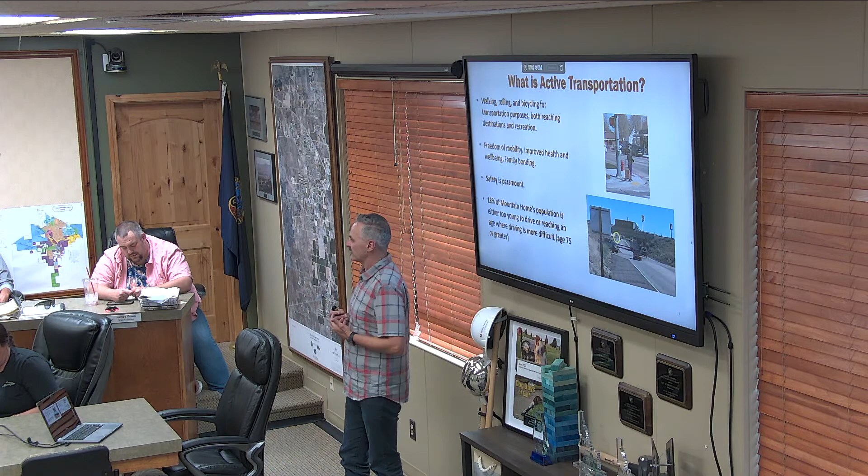In terms of active transportation, what is it? It's walking, rolling, or bicycling—rolling meaning folks using other types of mobility like scooters or people with disabilities—and looking at how they do that for transportation purposes, just going somewhere, whether it's a school, a park, a grocery store, a senior center. The big thing that differs in that realm is the senses we experience through it. That's just much more right there for us than we tend to have in our automobiles, which take away a lot of our senses. We even now have noise-canceling cabins in our vehicles and things like that.

Really for our community, when we think of statistics, roughly about 1 in 3 are at an age where they're either too young to drive or reaching an age where driving is becoming more difficult. It's about their freedom to move about their community, especially here in Mountain Home. We've tried to take that through that lens in looking at this.

So a little bit of Mountain Home by the numbers: you guys are close to 16,000, with some notable growth numbers. We know we've seen the growth before, and because of the dynamics, especially with the base and other things, 1 in 4 of your population is age 18 or younger. Weirdly enough, 1 in 8 is over the age of 65, which is a bit of a different number than we see in a lot of places—we start seeing more of an aging population here.

1 in 5 have a disability in the city, and another interesting statistic is more than 50% of those that do are actually in what we'd call the working age, 18 to 64. Oftentimes we'll see this number reflected more in the older adult population, and I'm guessing whether that's from veteran status or other things related to the military. But if we know 1 out of 5 has a disability, we know their ability to get around, cross the street, and do some of those things is limited.

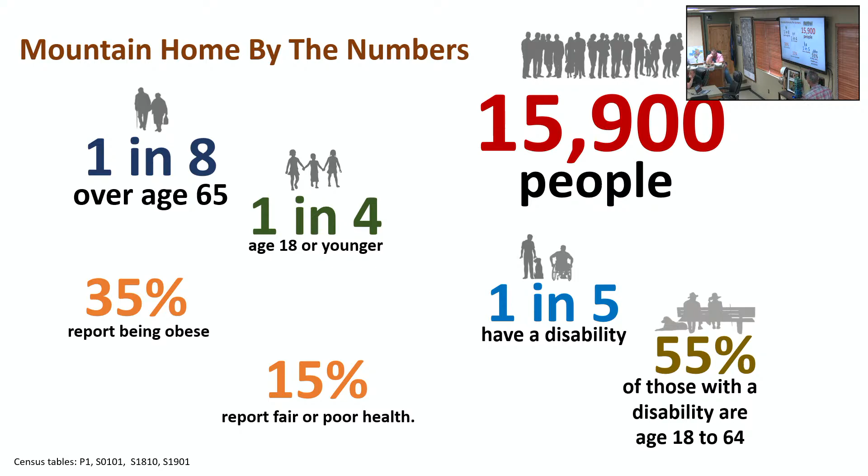Our work and efforts try to integrate things about health and improving that part of the community. The data for the city shows about 1 in 3 report being obese, with about 15% reporting overall fair or poor health. This has given folks the ability to address that.

One of the things that happens here, if you look at census numbers, one limitation is that the only transportation figures included are people's journey to work. In much of Idaho, and you're no exception, people's journey to work takes them beyond the city limits, whether they're commuting to a place like Boise, which we see a significant number of, and certainly the Treasure Valley.

When we talk about the walking and biking piece, we know there's a limiting factor in terms of the commutes. Instead, look at it through the lens of when people get back here to their community, how can they access the destinations and places they want to be if they've had to go through an hour or so commute.

The map shows the data in terms of what those commute flows are, or it did. I don't know why it disappeared. Come back, maybe. Never had that happen. It could be our HDMI cable. Just saying. There we go.

So what you see in the circular number is of the people that live in Mountain Home and are employed, 1,800 are able to live and work in the city, but 4,000 every day leave the city limits to go elsewhere, Air Force Base, other parts, and 2,200 live outside the city and come to the city to work. So that's some of the dynamics that we're working with.

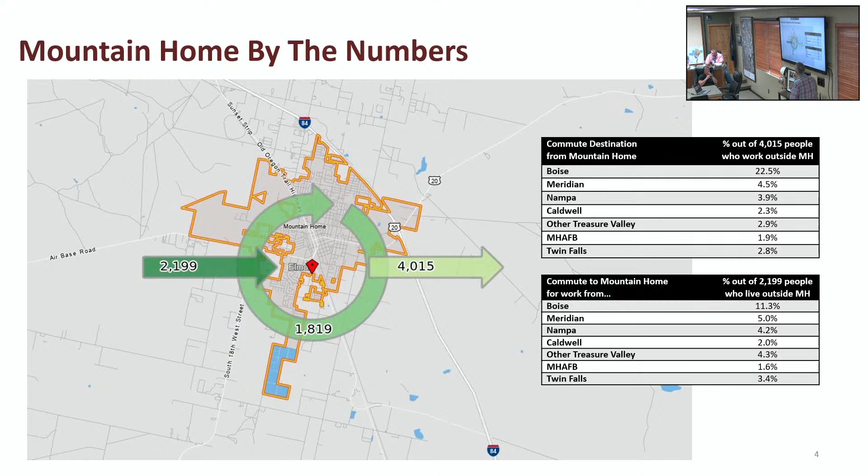I'm going to turn it over to Chris to talk a little bit about the bigger picture of things and why some of this is important, talking about the reasons why people, and the studies show, are willing to walk and what they're willing to walk for.

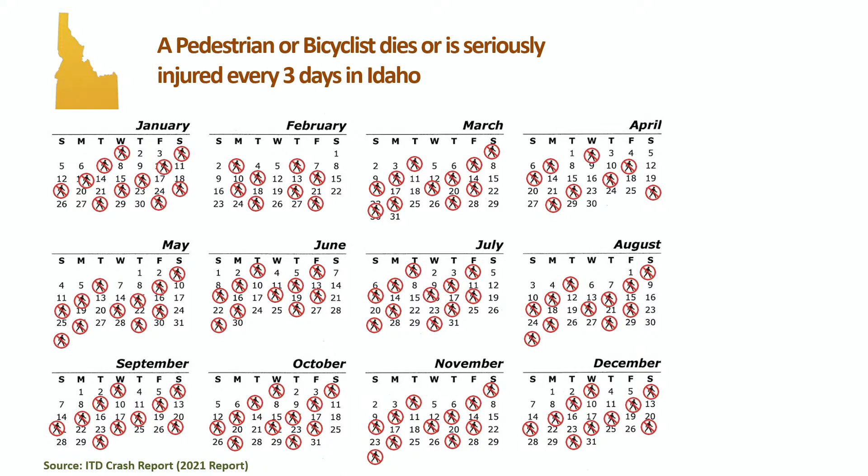Magnitude of nearly $400 million. Overall. Was that me? That's reverberation there. Sorry, anyway, just making sure.

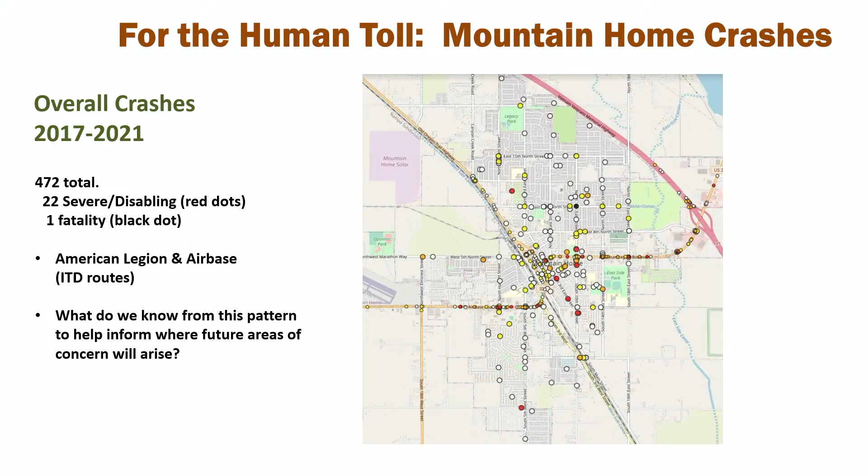But there are some pretty interesting things that we see. You can visually look and see for yourself where we see hotspots. Out of the 472 all-in crashes, this is not just a bike-ped crash, but all in, 22 were severe, 1 fatal, and we definitely see some patterns. We'll look at that now, specific to bike and ped. This was something we crunched just a couple days ago, and it was pretty compelling to me.

It tells you that this is a place where people want to walk because of the land uses. It tells you of the safety issues of crossing and so on. It says a lot. But when we think about that, the question is, okay, what do we do with that? So I want to breeze through these 4 C's components, and hopefully plant a few seeds about some of this stuff.

When we think about roadway design, I want you to start thinking about comfort first. We think a lot about our vehicles, our vehicle speed. We think about if 4 or 5% of all traffic is comprised of freight, it totally changes the geometry we apply to the streets and the curves and so forth. We think about our headlights, our vehicle height.

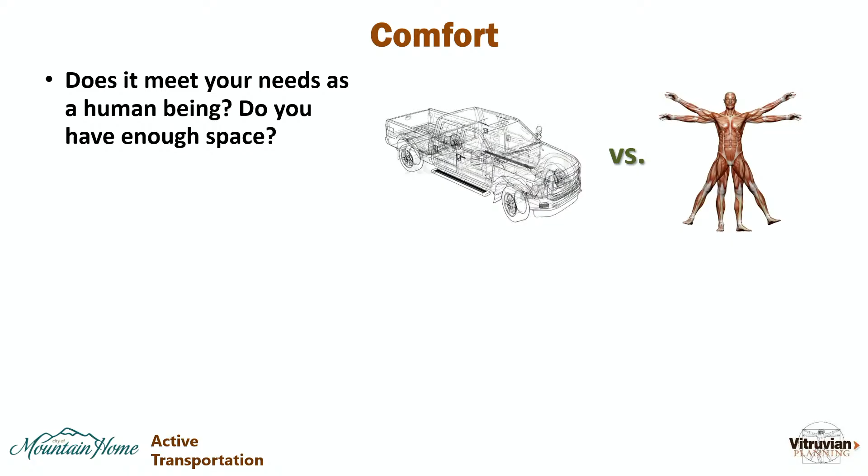But I want you to think about this other part of it: your comfort, your height, your sight, your width, your walking speed, all of the things that go into making you, and we look at all of the people of Mountain Home, our differences amongst one another. So when we put this all together, we need to think about, at least in some respects, our width. I think about, we put people in hula hoops as a demonstration tool.

Shaking your head, I don't remember who we put in hula hoops while we were here. Who was it? Do you guys remember? We always try to put the mayor in, so you're lucky you missed out on that one.

We do it for a reason. When I ask about your personal space, how much space do you feel like you need in order to be comfortable next to the person next to you? Almost to a T, it's about right here, this much. This is the bubble. That hula hoop represents the bubble space.

When we think about our sidewalk space in a residential context or in our downtown, we think of multiple scenarios, someone who's jogging versus walking, someone in a wheelchair.

All these different dimensional needs are important. The last thing on this is also thinking about this vertical barrier. I want you to think about your code. That's part of why we wanted to have this joint meeting, thinking about your own code.

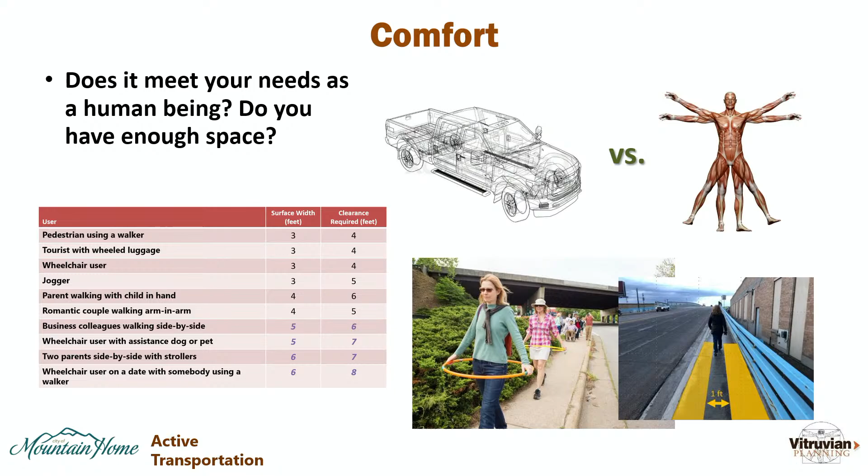If someone put a fence on their property line, right on the edge, next to the public right-of-way, i.e. the sidewalk, what does that mean? It means our functional width of that walk space could be reduced, even on a 5 foot concrete surface. We don't walk right up next to it, we give ourselves space. That's why in our code we often back that fence off by 6 inches or maybe even a foot, trying to make sure we optimize our sidewalk space.

Other comfort factors include speed. Speed is a massive, incredibly important factor. When you see children walking all the way off to the side, what are they doing? Are they unintelligent human beings walking nearly in the ditch? No, they're trying to protect themselves because they physically sense the speed of motorists coming towards them, trying to avoid being a statistic. If it's 20 miles an hour versus 40 and you're struck, there's an inverse relationship between survivability.

It makes sense. A slower speed is efficient in some ways, and we're hopefully trying to avoid being the statistic we talked about earlier.

Context, the next of the 4 C's, number 2. Context is really important in the sense that not one size fits all. Again, if I look at your code, and we did this as part of your plan, so that's going to be in the report, in a working paper: how do we differentiate our commercial zone, our industrial zone, our residential zones in terms of our application of a walkability type of principle?

They definitely ought to change because the environments change. If we just apply a one-size-fits-all 5 foot facility everywhere, it's not really going to be used by very much, it's not optimized as an investment. So the tax dollars you're using to put that infrastructure in may be limited in its return on investment. Context is a big piece of that.

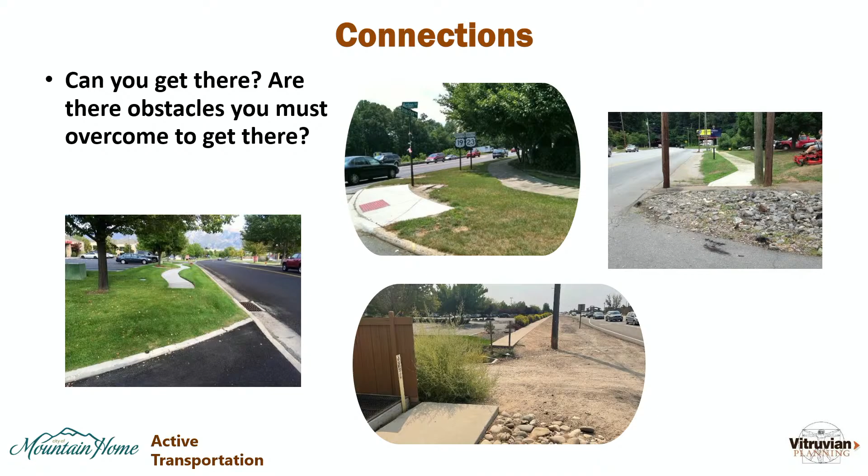But what about in the interim? There are so many other ways to allow us to get from A to B and provide some basic types of infrastructure before we even have to get to curb, gutter, sidewalk. That's part of the things we've talked about and are going to be in the plan we provide to you. So those connections really are important.

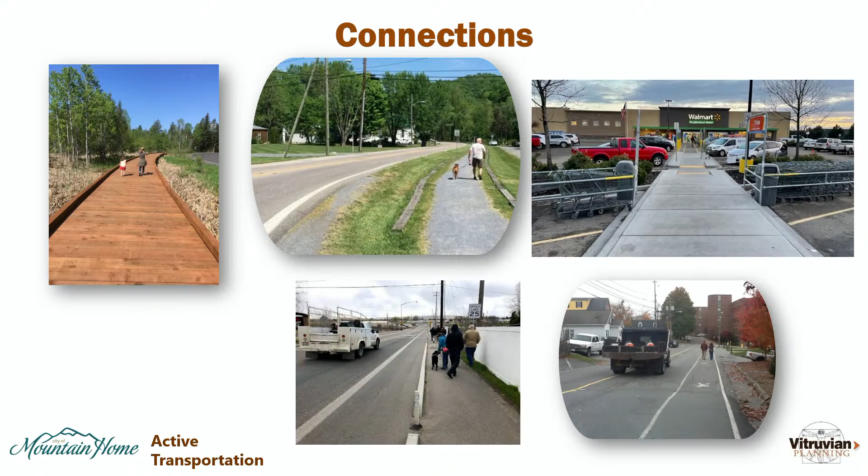Other ways, even getting to the front door of a major retailer or even a minor retailer, but not having to worry about dodging vehicles coming in and out of the parking area and other pieces. You get that. Last thing for me in terms of the C's is crossings.

In our state and really across the country, give or take about 65% of folks who are struck and injured, killed, what have you, involves this - just trying to cross the street, man. I'm just trying to get from A to B.

One thing that drives me nuts is going around this country and seeing bus infrastructure - we have a bus stop, and if we don't have a crosswalk to get near, then that is a wasted opportunity and wasted investment, frankly. And we ask the question, well, no one's riding the bus. Well, if I can't get back and forth to it, then that's your answer, at least in part, right?

But this crossing is so important, and we spend a lot of time coming up and describing various ways to help get across the street. When we go out on the walk, we'll illustrate some of that. So whether it's curb extensions that bring that closer together, the whole point is just keeping me out of harm's way. It's limiting the amount of time I'm exposed to essentially a moving vehicle that could hurt me, right?

So there's lots of different things, these are just some of the keys. Minimizing crossings, the distance between crossings - ask yourself this all the time. If you're in your city or another city, and you want to cross the street and you look around, right? Where's the nearest crosswalk? Marked crosswalk - oh, it's clear over there. What's our impulse?

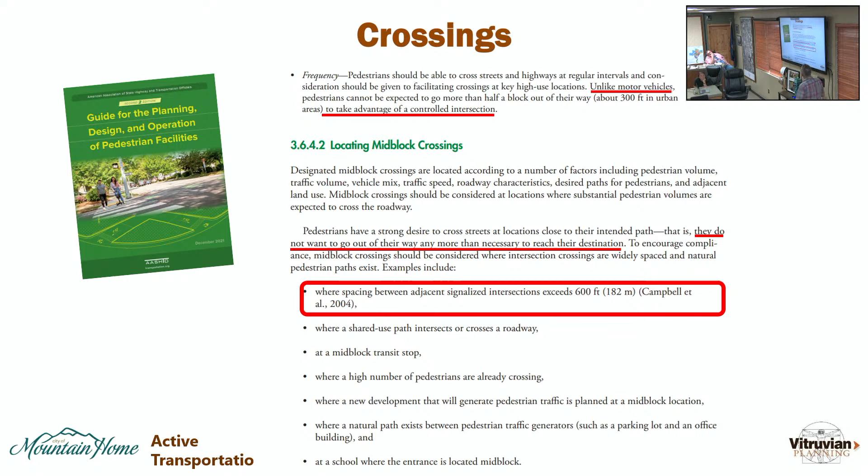So Chris covered a lot on the walking side of things, and that's really the fundamental thing. It's something we as a species are designed to do and have been doing for a long time, and it's the mode that most people take part in.

I want something different. What the science now tells us is, in the same way we separate a sidewalk from moving traffic, we should think about bicycle facilities, especially on higher speed routes, because that's what people are more accustomed to. If we make this investment, we appeal to the broader population and support the kind of trip making where people are willing to get places by bike with their family, to get to the park. The best example of that is the pathway system you already have.

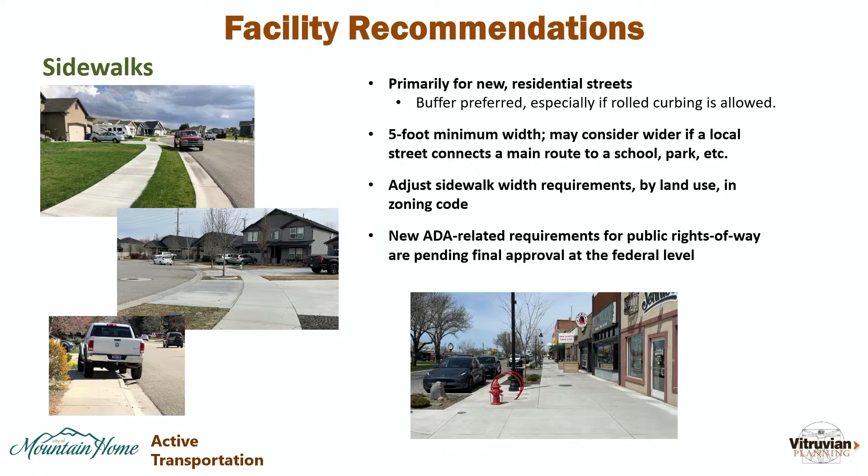As Chris said, adjusting sidewalk width requirements in the code by land use. Do we need sidewalks and a big pathway on both sides of an industrial street? Probably not. Let's reserve that for the areas that may be more conducive to those kinds of things and be sensitive to how those different land uses do occur.

So when we get into specifics, this is what you're going to see. I'm going to move you through some different facility types that are mostly combined for active transportation and the types of routes they would go on. Getting back to the effort in terms of buffered facilities for bicycling and walking, what's called a side path is really becoming the preferred treatment, especially at the ITD level for roadways—no longer the in-street bike lanes.

We might need to adjust for right-of-way. We may need to consider doing this on only one side of the street, but it gives you the foundation to start that conversation. And oftentimes when they go through those things, they will look at your city plans to kind of start that discussion. And certainly you guys, I think, with the downtown project have a really good rapport. I think they showed some flexibility in other things that we definitely use as examples in other parts of the state when they have the same efforts.

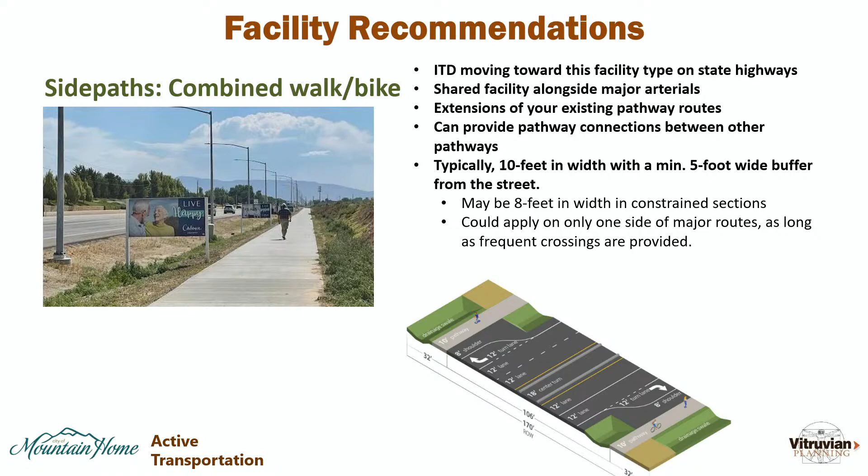In general, they're 10 feet in width with a 5-foot buffer, but you can go narrower and put in vertical elements if you have constraints. We will outline some of those design conventions in the plan.

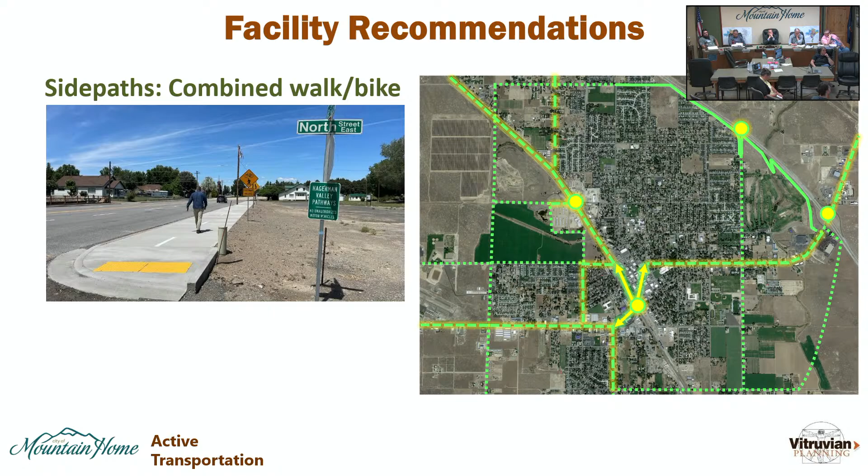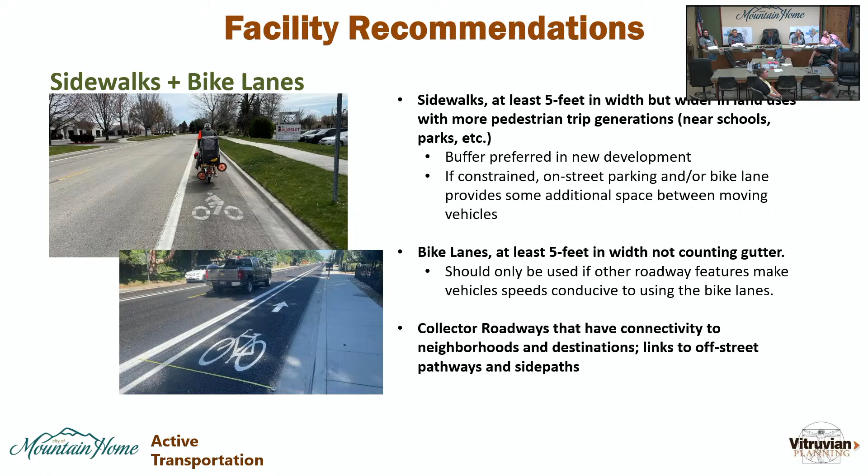Working our way down, it's a combination of things—one being a more traditional approach of sidewalks plus bike lanes, generally reserved for streets with lower operating speeds and lower vehicle volume, so people are more comfortable, though it's still necessary to manage speeds. So whether it's a buffered bike lane without a buffered sidewalk, or a bike lane with a buffered sidewalk, that's a combination. On the north side of town, a lot of those north-south local routes that connect are the types of situations we'd look for that. Given some consternation and street constraints about bike lanes, if we can do other things to calm traffic on the street, it makes it safer for drivers as well.

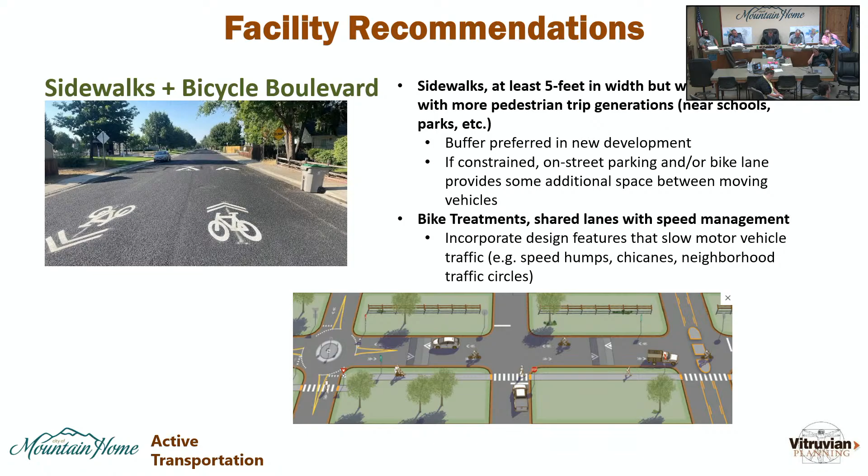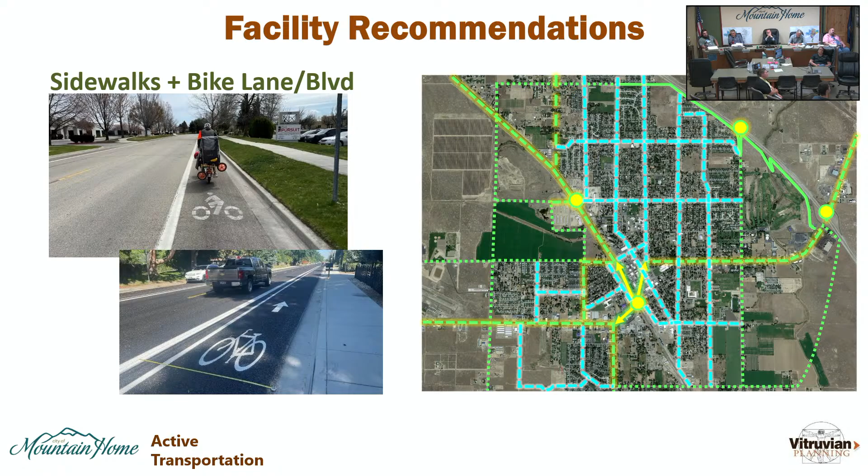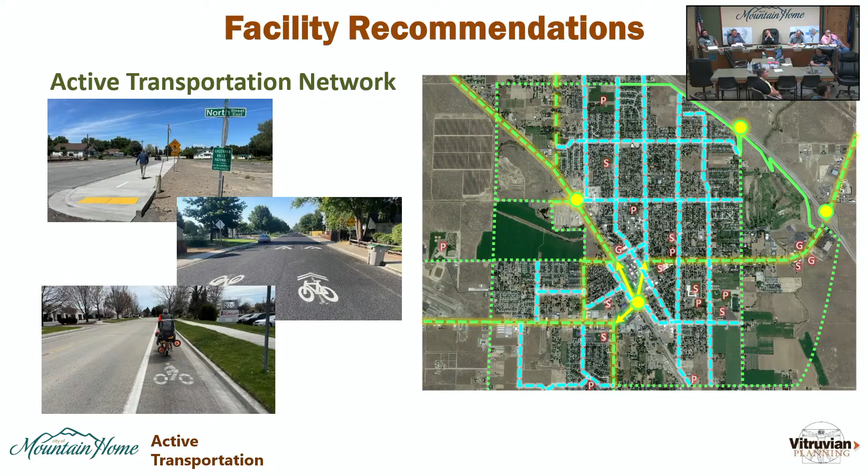When we look at your land uses, P is a park, S is a school, G is a grocery store, and one of our goals was to connect those types of destinations. So I want to ask—where is your grocery store west of the tracks? You don't have one, right? But with the growth and things coming, it wouldn't surprise me if in the next several years you start to see an application or something there. Hopefully with the system we've integrated, it can be made so that...

Is it a touch screen there? It is, it is a touchscreen. Is it? Yeah, maybe that's the secret on there, I don't know. I deliberately have backed away and not moved. Not touch. I believe you.

All right, maybe the last time. We're almost done with this. And then finally, the crossings. As Chris said, this is probably the most critical piece. I would say as a short-term endeavor, working with ITD especially to package some of these. You've done some of them already, and we're going to talk about a couple different types.

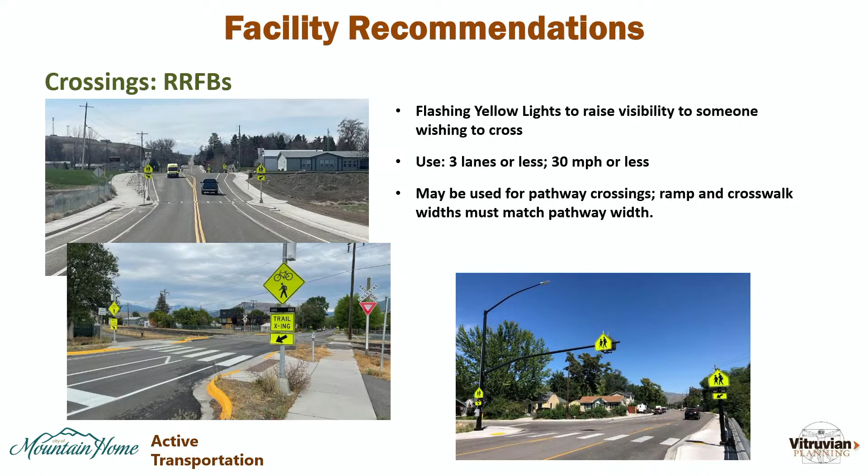This again is where the science and understanding of these is changing, because they're a relatively new application. Here's an example with your pathway crossing on 18th. This is the type of setting, a 2-lane street, pretty good visibility. A potential upgrade to that yellow flashing light could be in the cards at a situation like that, especially if people are coming across that overpass and from the sight distance standpoint.

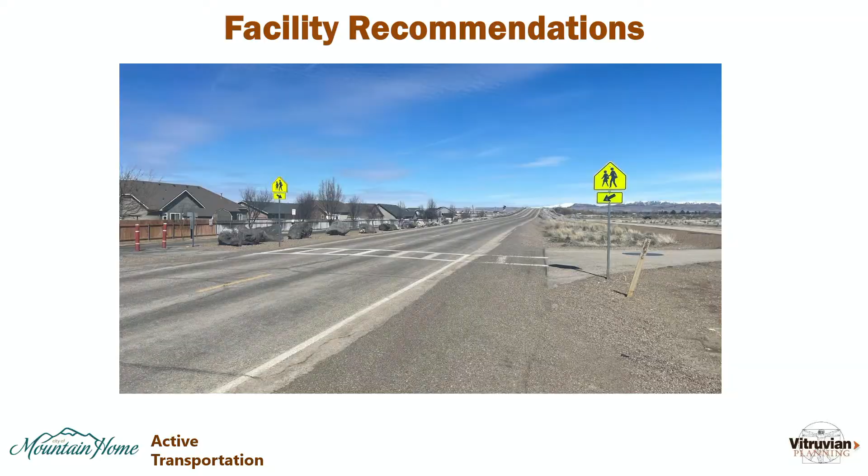On the right-hand side, I'll tell you a story firsthand. When we noticed, I want to point out a detail here: what side of the pathway, as you're facing the street, is the signpost? Right here, so if I'm facing this way... what side of the path is the signpost?

It's on the left-hand side, right? So if I want to cross over, that signpost is over here. The city of Ketchum had us come out and take a look at one almost exactly like this. They had the flashing beacon, I think it was even more robust than that. And they're like, people aren't using it, we can't figure out why.

90% of you in this room are right-handed. When you have a bicycle and you have one free hand, where are you looking to use it? Guess what side of the trail their button was located on? The left-hand side. So because it was on the left-hand side and it's a trail, people were feeling like, well, do I have to go on the other side as people were coming against me and it's my left? There was no natural movement or inclination to go that way, so no one was pushing the button. It was as simple as that. Moving it to the other side and miracles happen. It's so silly, right? But yet there was a reality.

And if you look closely at this one, that's exactly what they did. On this side, a joint pole with a signal or with a button, that's obviously the cheapest, but over here there's a separate button that is on the right side. That's kind of the devil's in the details of some of those things.

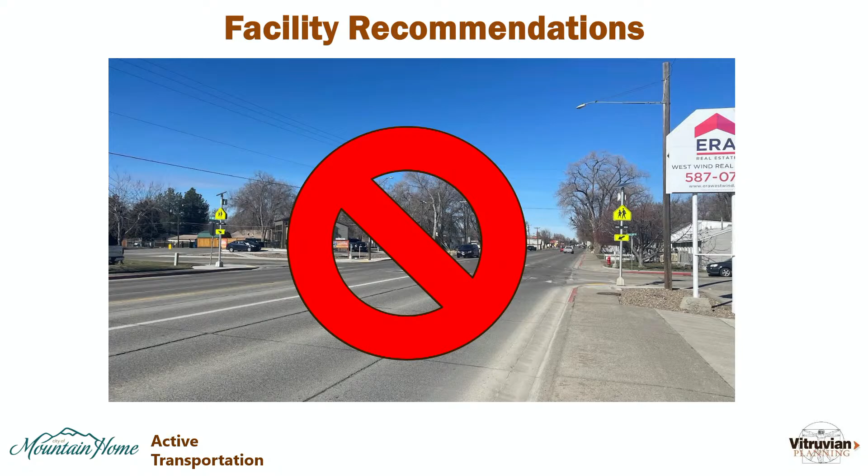When we look at stuff like this, this is where the science and understanding is changing. We're starting to realize that recommendation of these on a wider street is challenging and may not have the same results, because where you put these out, they're so far out of our peripheral vision as drivers. It's where we need to think about something a little bit of higher level. Our recommendation would be to try to work with ITD and move in a different direction on some of these, especially where you've got school crossings. That's with what's called the pedestrian hybrid beacon.

These are signals for when a driver is stopped. The solid red means stop, and that corresponds to when a pedestrian has the walk signal. The moment the countdown starts, this begins what's called a wigwag. So when you pull up to a railroad crossing and see the alternating red, it changes to that.

This means a driver may come to a complete stop and then proceed if it's clear. The reason these tend to find a good balance is if we put a full traffic signal out there, those of us who can walk faster can get across in 10 seconds, but we have to give 30 seconds, which doesn't make the drivers happy. This finds that particular happy medium.

This one is actually on an ITD route we found out in Montpelier with the school zone, so it's kind of a precedent for those. This is where we're talking about 4 lanes and wider. The good thing with both of these is there's not a hard and fast number of pedestrians that have to be crossing to justify them. The reason is these are meant to be more flexible and applied without the same rigid standards that apply to regular traffic signals.

You've probably all been in that discussion with ITD: can we get a traffic signal there? Well, no, it doesn't meet warrants because of factors X, Y, Z, Q, and P. They can be a lot more flexible with these to upgrade for those situations.

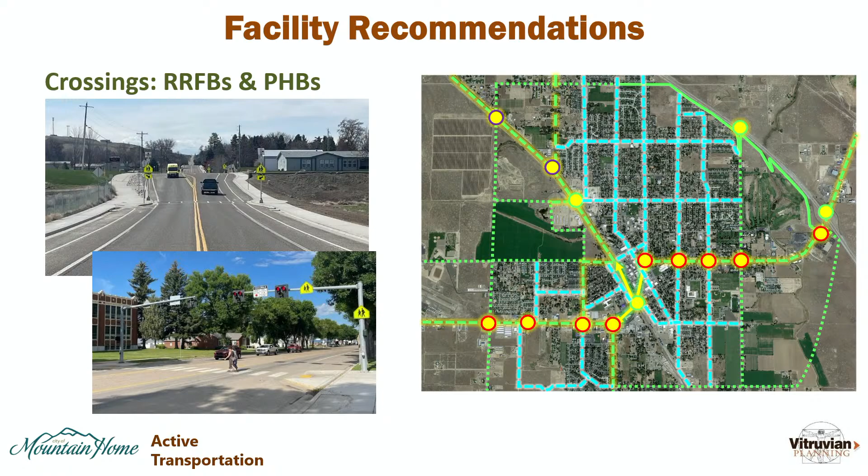We put these two in as crossing issues that might be related to the railroad tracks or the highway, and that's a whole other different dynamic. Typically, because the railroad tracks are built on a berm, a tunnel underneath is much more conducive, but you know how working with railroads can be. Some of those things we see as a little more aspirational.

Next steps: we're going to be wrapped up with this part by the end of September. That's both the city deadline and for the Idaho Health and Welfare grant. We're ready to put pen to paper on the detailed plan sections related to the facilities. We sent your staff a working paper on some data and policy work, so you'll see that in the iterations of the plan, integrating it with the Ardura effort.

Chris and I, with the work we do across the state, are always a phone call away on this stuff. I know Rich and others have done that from time to time—always happy to answer those questions. Making this sausage isn't always the prettiest process, and this is just one element of a bigger transportation plan we're considering.

So what we want to do for the last bit is go out and take a walk and see some of these in the field, what we're talking about. But with the two folks online, and certainly any questions here in the room, we'll be happy to answer those if you have them.

Mayor? Councilman Brennan? Yeah, it's a question. I know it's kind of hard for me to follow exactly, but you've spent a lot of time on bicycle and pedestrian information.